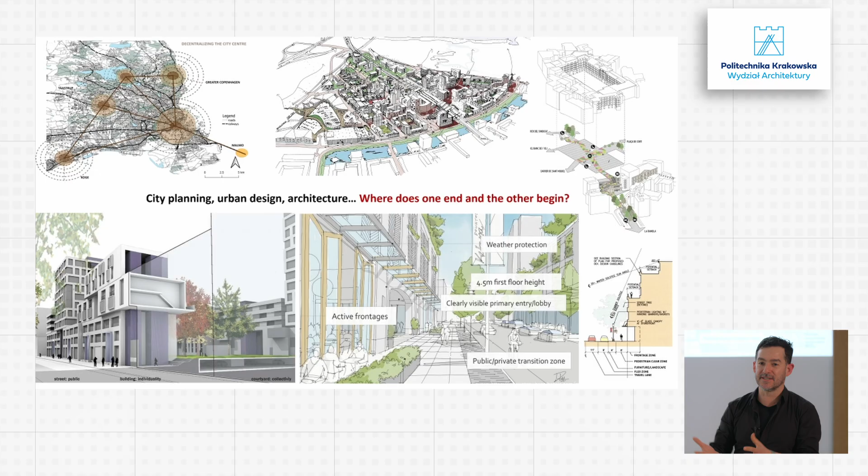City planning is more complex because it goes through all the scales. And architecture is something that we mostly do in the more detailed scales, but of course it also has to do with the larger scales. So all these three disciplines are really interconnected in many different aspects. If we want to put it simply, it is complicated. I would like to show you here some examples. How can we make these complicated things look more simple?

We know very well that those guys made all those things look simple. I mean, the Romans were quite good at creating very successful cities quite fast. They had quite a basic recipe to create cities. All of them looked quite the same. Of course, they were adapted to multiple contexts, but they had this quite standard formula.

They had this grid with two main streets, Cardo and Decumanus, and a wall and a series of public buildings that were very important for the well-being of the inhabitants, from temples, baths, and other types of facilities for the well-functioning of the state.

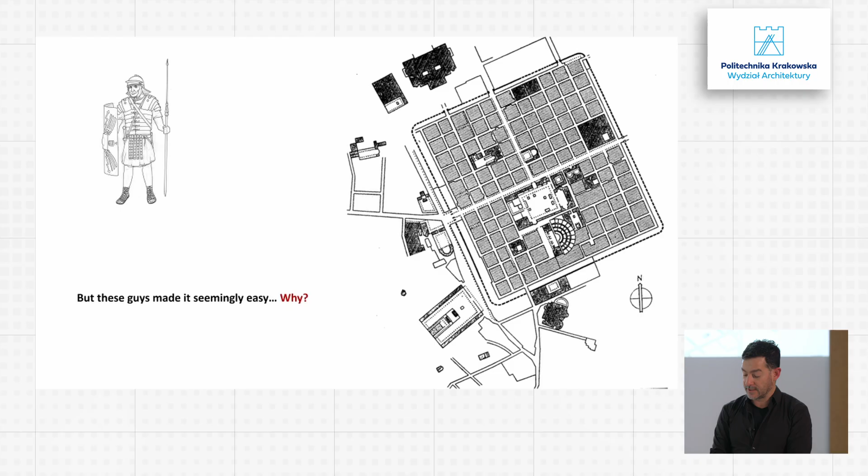Here we have one of those typical things. They were not always exactly square. Of course, they were adapted to the local topography and the local conditions, but those elements were present in most of the cases. And if we see in the drawing, oh, it's not passing. Yep, it's there. Here we can see that it's not exactly that square thing. It is adapted to the topography, but all the elements are there.

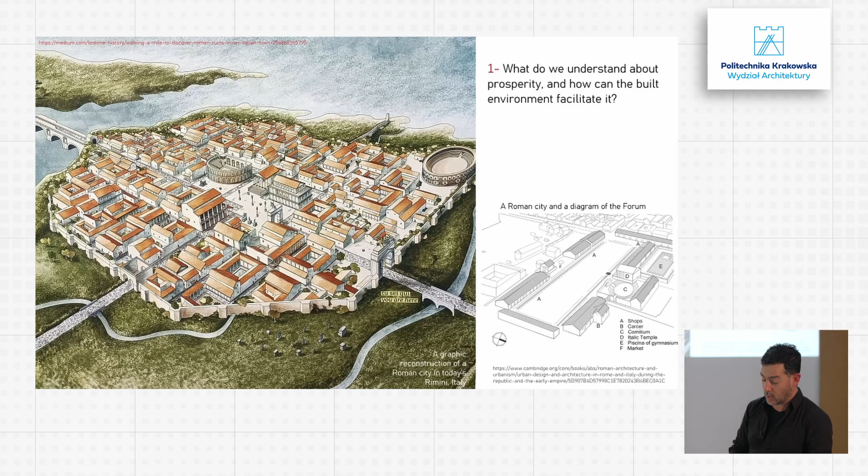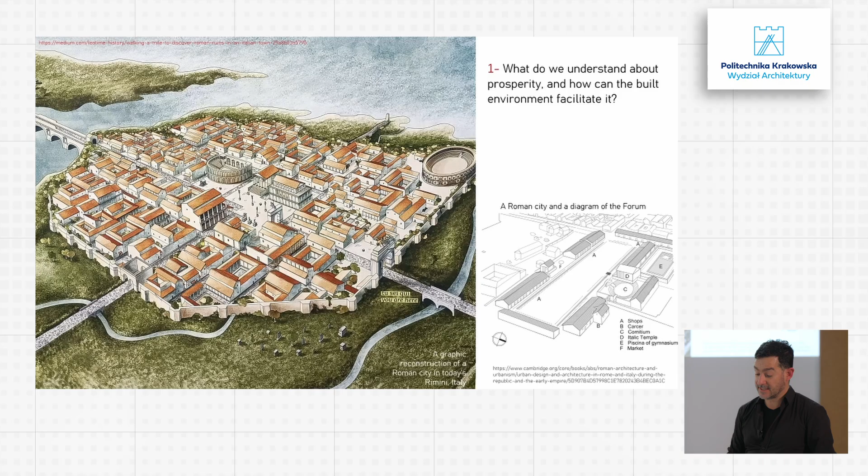So if you see here in the image, you have a series of things. For instance, the main square, of course, had commerce. It was a space for commerce, a marketplace. But it was also the place where you put the main temple, and where you located the most important buildings for the distribution of justice, power, etc.

And the rest were quite simple buildings. They only dedicated much detail, beauty and effort to the very important buildings: the temples, the public buildings. But as you see here, housing and the rest were quite simple buildings. And also infrastructure. They were simple in a way, but they were made for lasting. We still can see pieces of Roman cities in many places, and they have been standing for 2,000 years or more.

And if there is something that we can say is sustainable, it is those things. They have been there for centuries, for millennia, and they are still standing, probably with very poor maintenance in most of the cases.

And the most interesting, they look nice. Probably you have heard of a famous Roman architect. When I was studying architecture, one of the first books we had to read was the Ten Books of Architecture by a Roman architect called Marcus Vitruvius Pollio. And they had this combination of three concepts that for them were very important.

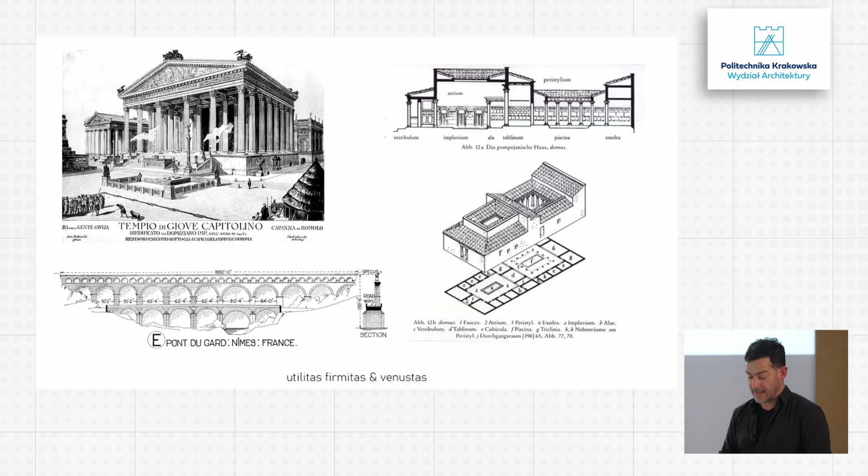Utilitas, which means utility. Firmitas, which means solidity or sturdiness. And Venustas, which means beauty. For them, all buildings have to combine those three elements. So they need to be useful, they need to be strong and solid, and they need to be beautiful.

Well, those other guys here, the Spaniards, when they went to the Americas, I think they also made quite good cities there, many interesting cities, and they had probably an even simpler formula for making cities. They had this basic, they called it the Laws of the Indies, and they had this very simple grid, in many ways similar to the Roman cities.

And basically what they did is that they distributed and separated very clearly the public from the private. They allocated to different people and institutions some plots in this grid. And of course, they located the very important buildings in the center around the main square.

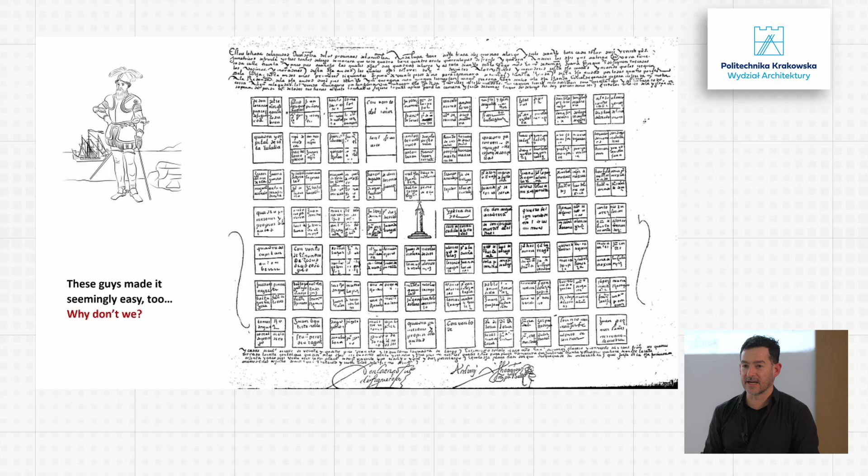And some facilities, of course, at that time, the state was mostly concerned about military power. Hospitals, education, that was a matter for the church. So they gave many of those very well located plots to different orders in the church, and they created convents, hospitals, schools, and so on. And of course there was some detail and care for beauty in the church, but for the rest, it was quite minimalistic.

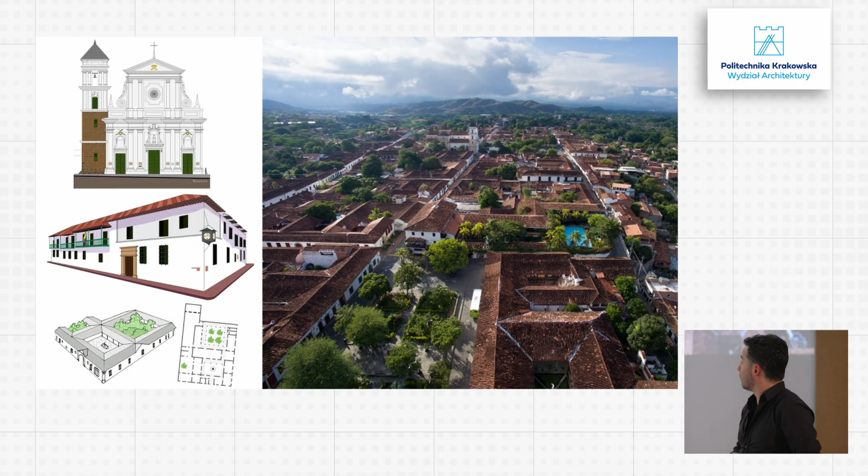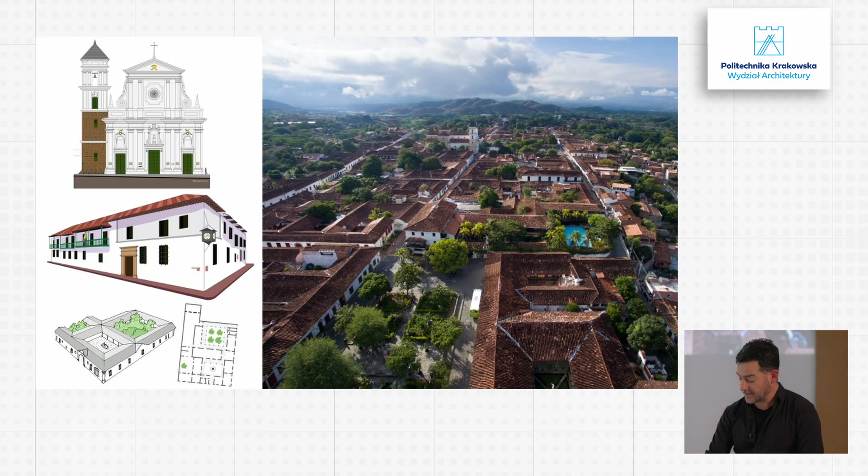And as you can see here, this is a Spanish city in my home region. It's called Santa Fe de Antioquia, in Colombia. As you see, it's a very simple city with this very simple structure, and it still looks quite nice. It's a heritage site in Colombia, and it's very popular with tourists and local people as well.

And I would say the same here in Cracow. I mean, those people in the Middle Ages, they had very simple formulas as well to make very nice cities. And indeed, Cracow is an impressive city. And the formula was quite similar to the previous formulas.

They located the very important buildings in the main square, but the squares were mostly an empty space for multiple activities, both for markets and for ceremonies, religious or civil ceremonies. And of course, in this main square was the church and the main public building.

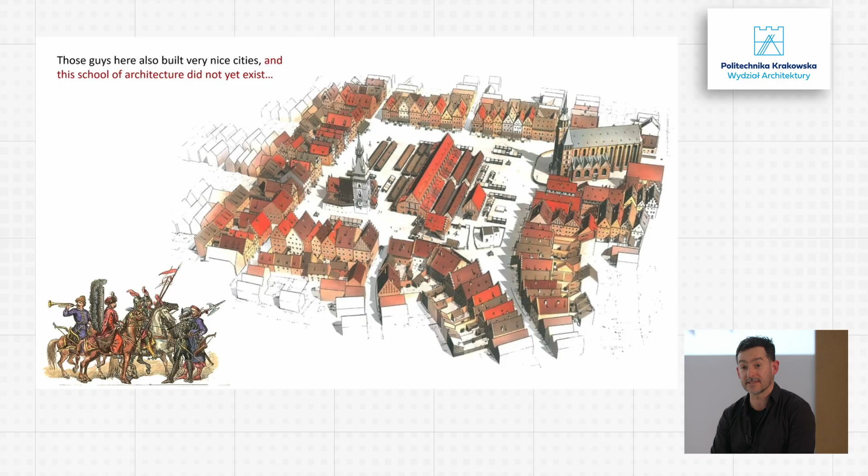And for the rest, they had, of course, some regulations for buildings, and all of them were grouped in blocks. So putting buildings together in blocks was a characteristic of those historic cities that you have seen in all three examples before.

Well, here we have a new development in Cracow. They are planning to have a city or a part of a city in Cracow for 100,000 inhabitants. And then I wonder, will the inhabitants call this area beautiful? Or will this part of the city be of interest, let's say, for the people who visit Cracow?

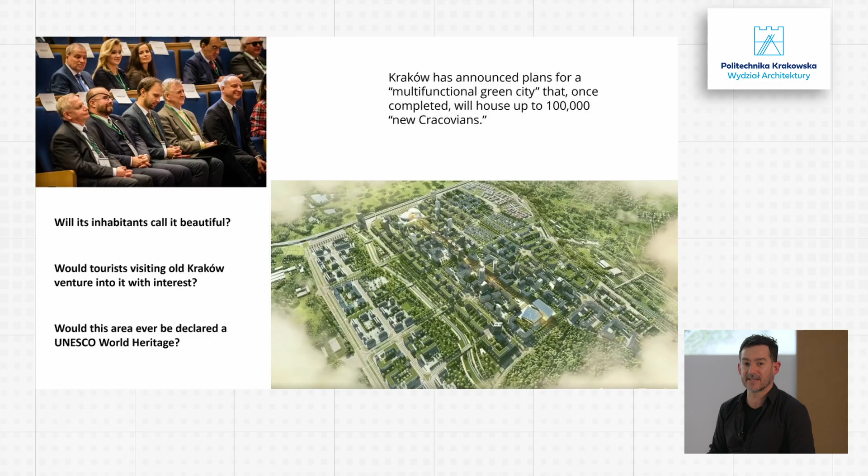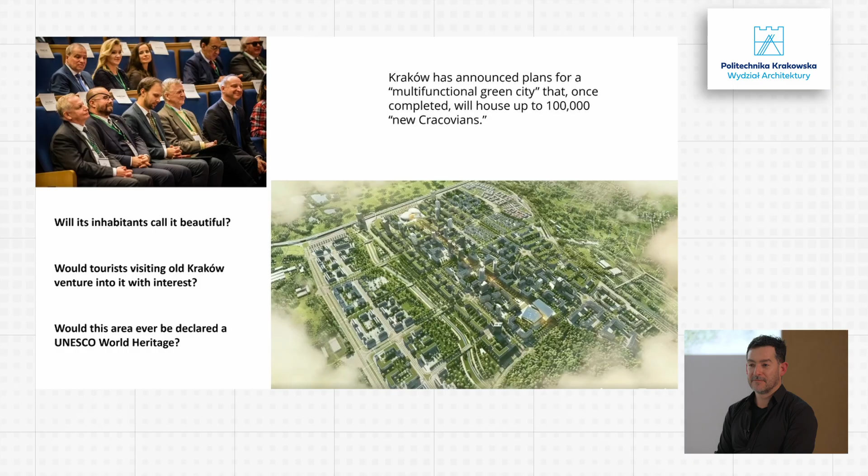Will it become an area, let's say, to declare UNESCO World Heritage? And, well, I guess that many of you will probably answer those questions with skepticism. And we know that we are quite bad today at making things that are beautiful, that are solid enough.

So I came to this question actually through a podcast. It's a philosopher that you can probably find easily on YouTube. He's called Alain de Botton, and he has a YouTube channel called The School of Life. It's about many things, but he has a few things about the built environment and why cities matter.

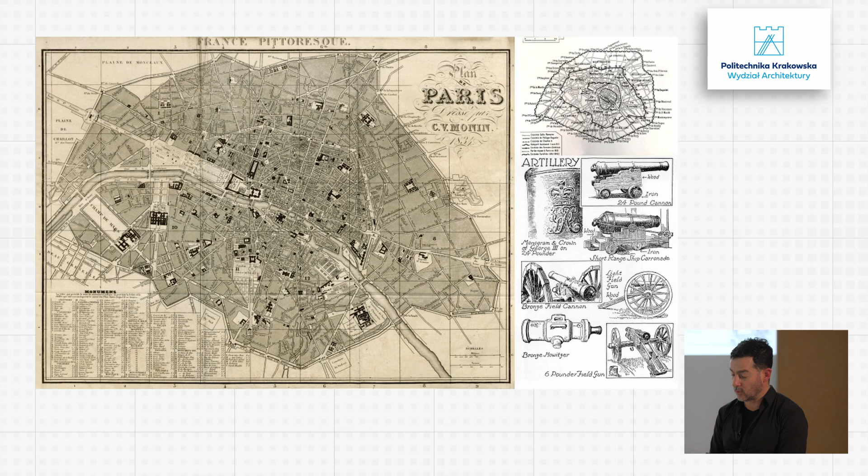And because of advances in technology, basically in artillery, those walls became problematic or unnecessary and so on. So they were removed, as they were removed here in Cracow. So that was one of the first problematic things in old cities. They were not good enough to be protected against the threat of war.

But of course, in many ways they had aesthetic problems. Many buildings were probably derelict, at least that was the case in Paris in the mid-19th century. They also had problems with functionality. It was difficult, let's say, to provide appropriate transport in a complicated, intricate network with a lot of narrow alleys.

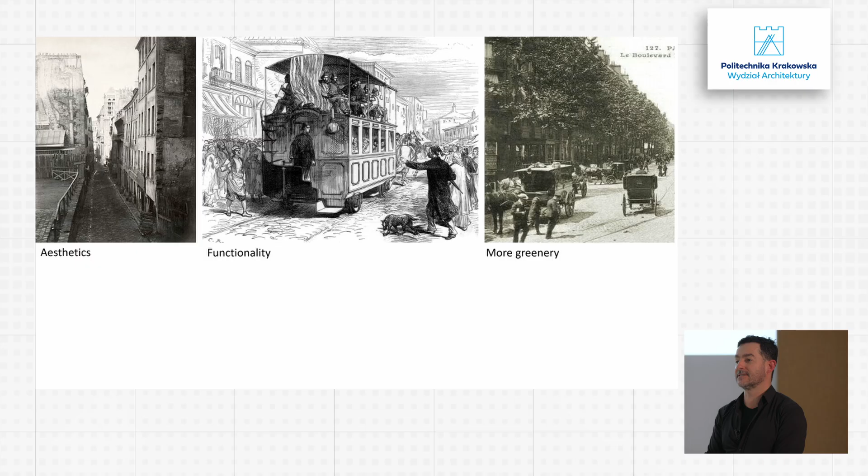And people started to realize with the advance of science that greenery, access to natural light, etc., was important for public health. So health became very important with the advance of science. We started to discover that many diseases were due to poor sanitation conditions, lack of air quality, lack of access to sunlight, hygiene. We needed better infrastructure, sewage, water, etc., and security.

So local authorities decided to make a big plan, because at that time they thought that changing cities can also change societies.

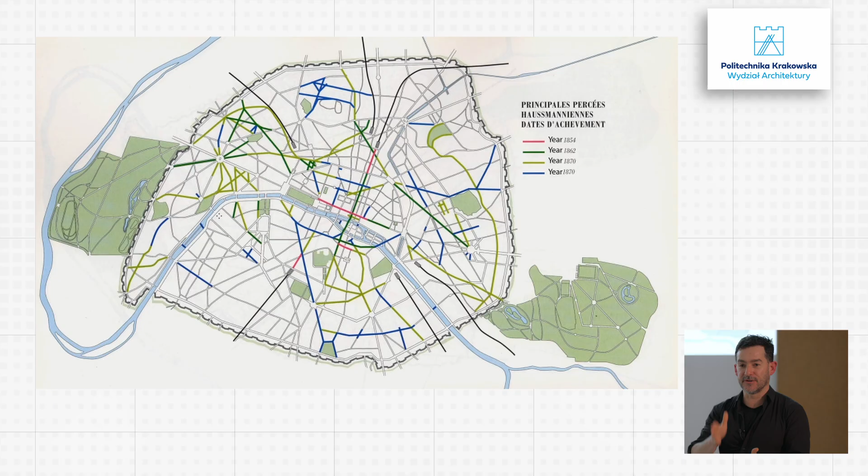And the plan was quite ambitious, because as you remember the previous map, Paris was kind of dense and very intricate with this medieval compact core. And what they decide is to make a series of new streets, new avenues, cutting this medieval tissue, this medieval fabric. In this way, they just go directly, straight lines, cutting through the medieval fabric, and that's the result that they had.

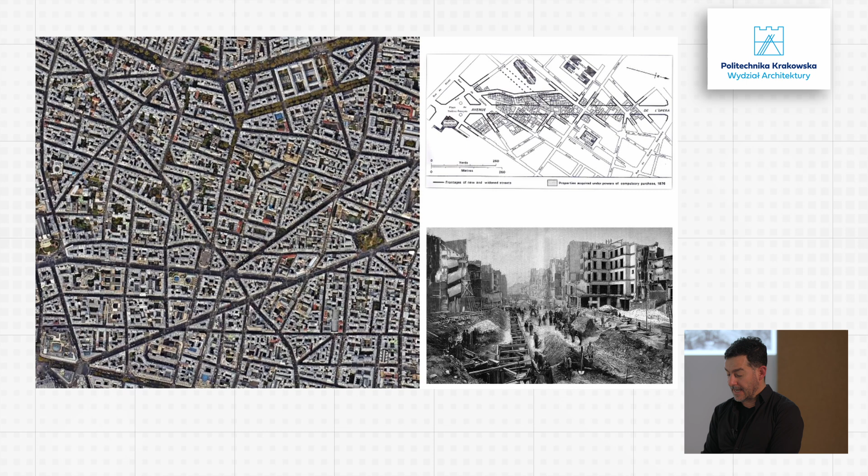So this plan, which is known as the Haussmann plan, lasts for 20 years. Haussmann was the mayor of Paris during that period between 1850 and 1870. And he did the very famous Paris that we know today, that we find very attractive. It's one of the cities most visited by tourists. And this way of dealing with cities kind of became fashionable, and many cities started to do similar things elsewhere.

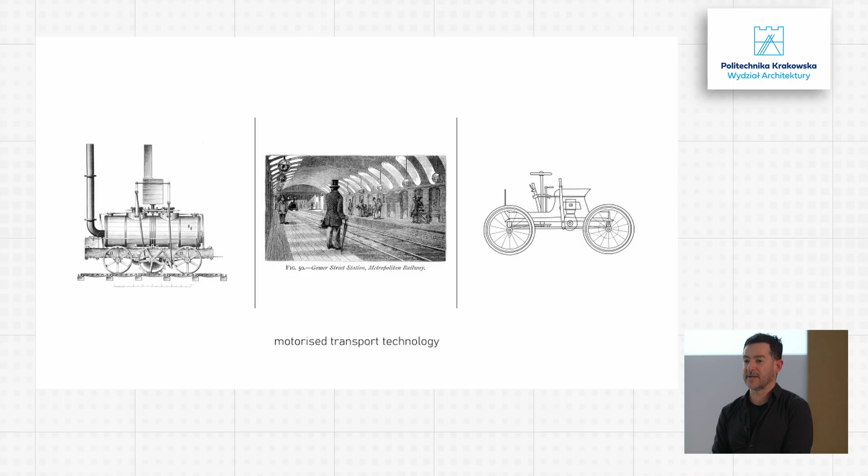But also in the late 19th century, we have a lot of new technological developments, and those new technologies also created new possibilities. The one, of course, was the introduction of the steam machine, the railroad. The first metro line, or the metropolitan train, was established in London around the 1850s. Paris and many other cities followed quite quickly. And the first cars started to appear.

And also we had a lot of developments in new materials that were quite radical for the time. It was the case of steel and glass. Imagine that in the Middle Ages, except for the cathedrals, most buildings were obliged to have very solid walls, small windows. We were unable to do those big glasses, so all was quite dark. And suddenly it was possible to have very light structures with a lot of glass. It was quite a revolution.

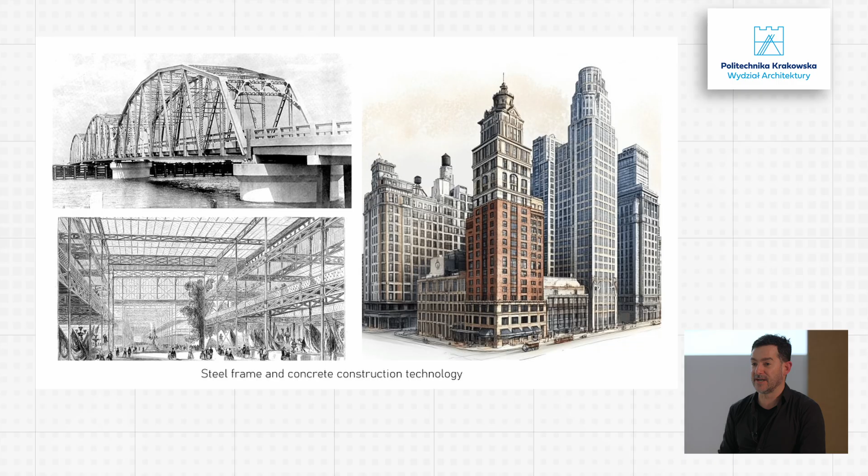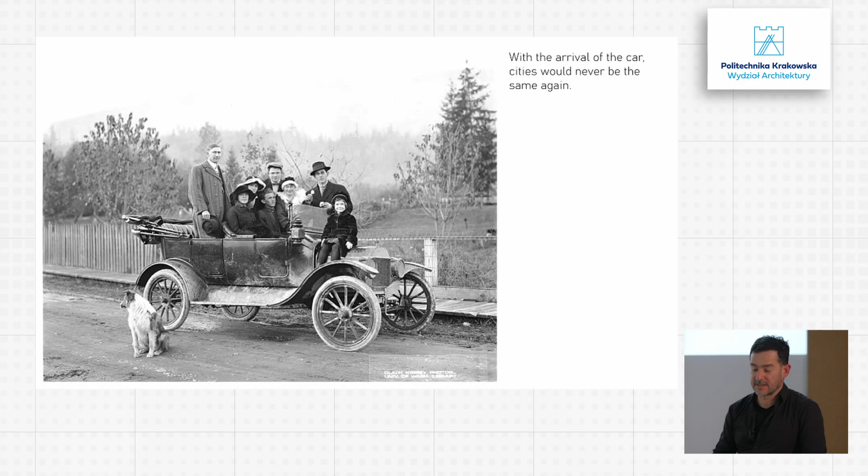And later in the United States, of course, it was also possible to do very high buildings very quickly, high-rise skyscrapers. So it was a huge revolution. And then we have the car. Initially, the car was to replace the carriage pulled by horses, and it was more a curiosity, something for the weekends. But very quickly an industrial production of cars was developed, cars became very cheap, and many people started to buy them. And they were very problematic in cities. Basically, traditional cities didn't have space, as they don't have today, for running a transport based on cars.

So then architects start to look for new solutions or new ideas about cities that can accommodate all those things. Okay, we have problems with hygiene. Cities are very compact. We don't have enough greenery. We don't have enough space for cars, and so on and so forth. And there were two very popular, well-known models. The one that you see on the screen was the Broadacre City in the United States by Frank Lloyd Wright. All of them were around the 1920s.

And basically, in the US, it's a huge country with a lot of land. And the type of city Frank Lloyd Wright envisioned was a city basically merging rural lifestyle with urban lifestyle, with new vehicles, and it was quite visionary. Those are not exactly drones, but look like drones in the 1920s, because of new flying devices. The aviation was starting, but also cars. So he thought that it was possible to live wherever you like in the vast territory of the United States. So it was basically cities where everybody would have an acre of land, facilities and production would be concentrated in some areas, and people would move around with these new technologies, meaning mostly cars.

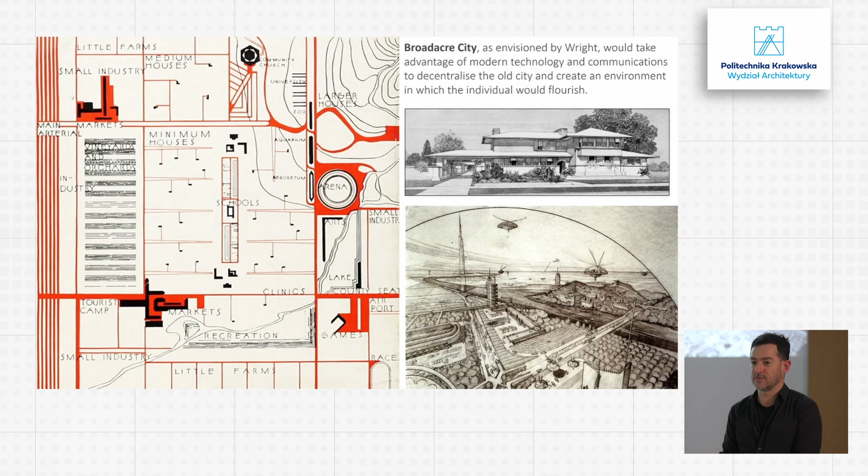In Europe, of course, we had quite a different situation. Cities were more compact. Land was not as abundant as in the United States. So Le Corbusier, that probably you all know, a very famous Swiss-French architect, came with an idea of making cities compact, not as Wright, who really wanted low-density cities. For Le Corbusier, the idea was to concentrate cities by functions. For him, cities were kind of machines for efficiency. The problem of traditional cities was that they were, according to him, very inefficient because they were mixing everything: traditional blocks mixing businesses on the first floors, housing on the upper floors. They were noisy, and everywhere it was a mess.

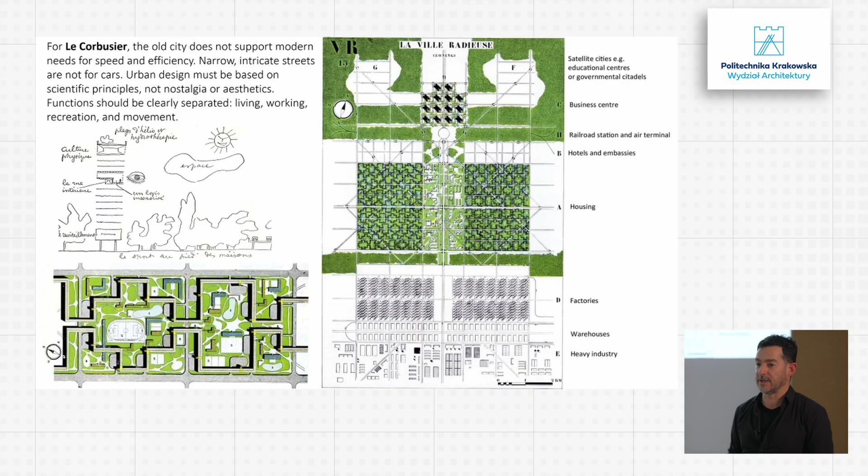But thanks to cars, it will be possible to divide and separate those functions. And basically, he came to the idea, as you see in this diagram, that it was possible to separate. In the upper part of the image, you see offices with administrative buildings. In the middle, you see houses. Then in the lower part, you see factories. And of course, in between, a lot of green areas where people will have possibilities to do sport, enjoy nature, and people will travel between those areas using cars, of course, and modern transport.

All of those visions had something against traditional blocks. As you know, all those old cities that we saw had these traditional blocks that you see there on the left. And for Le Corbusier, the way of dealing with blocks was to concentrate them in large superblocks with a lot of high-rise housing.

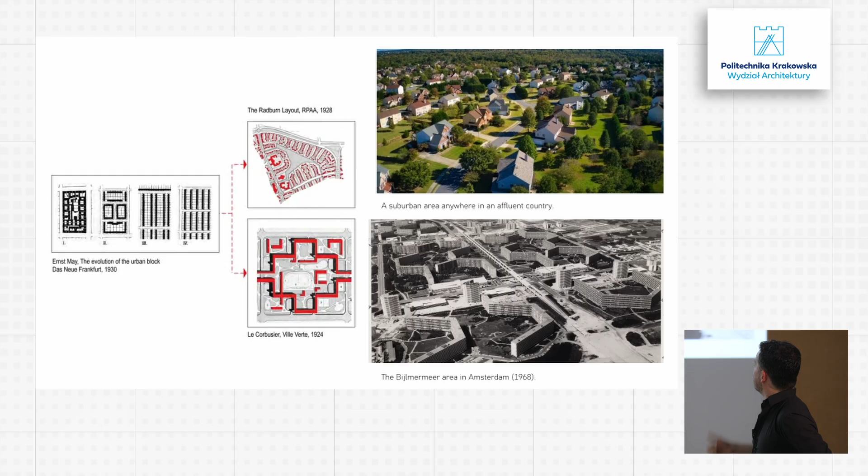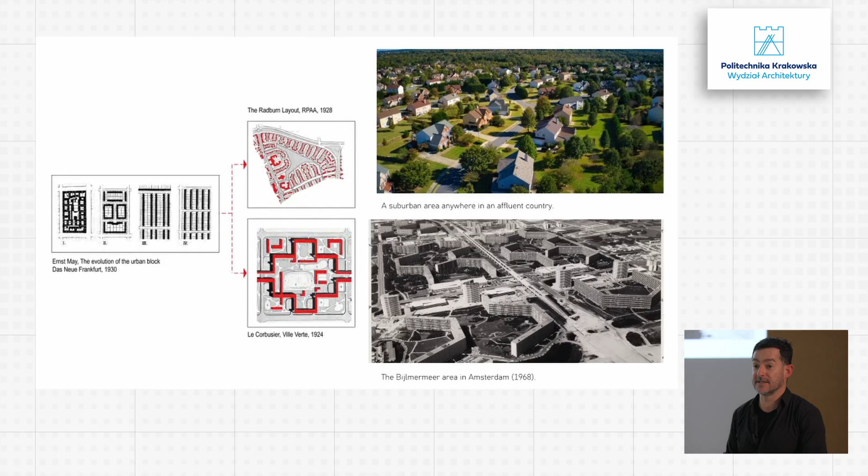And in the United States, in the application of Wright's principle, it was of course not possible to have that much space, but they came to this diagram that they call the Radburn layout. And probably you recognize this type of pattern in many cities today. It's still going on. It was a layout developed almost 100 years ago, and it is very common in all suburban areas today. And of course, the Le Corbusier approach was also very much applied, especially after the 1950s in the post-war cities in Europe.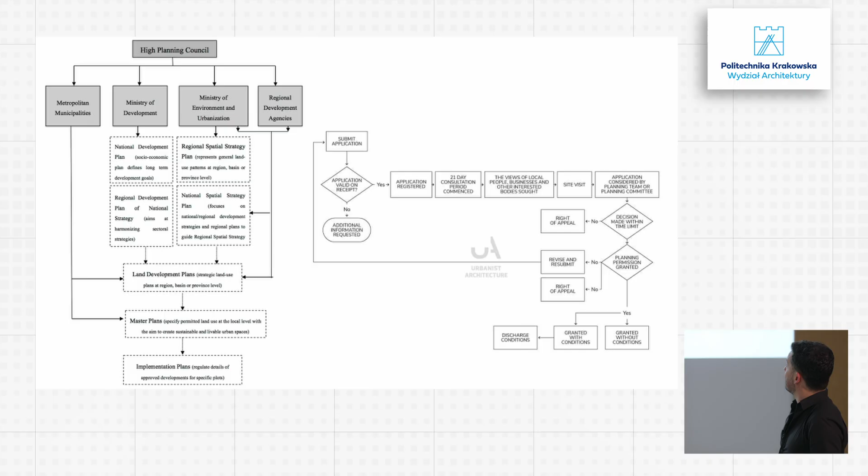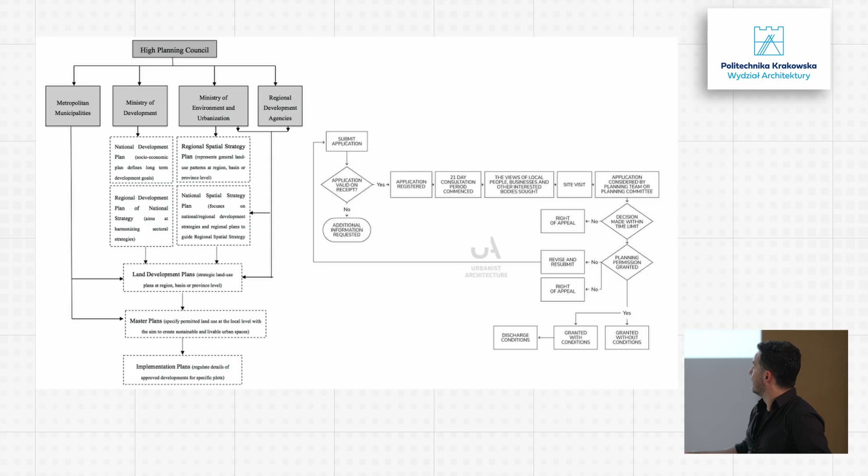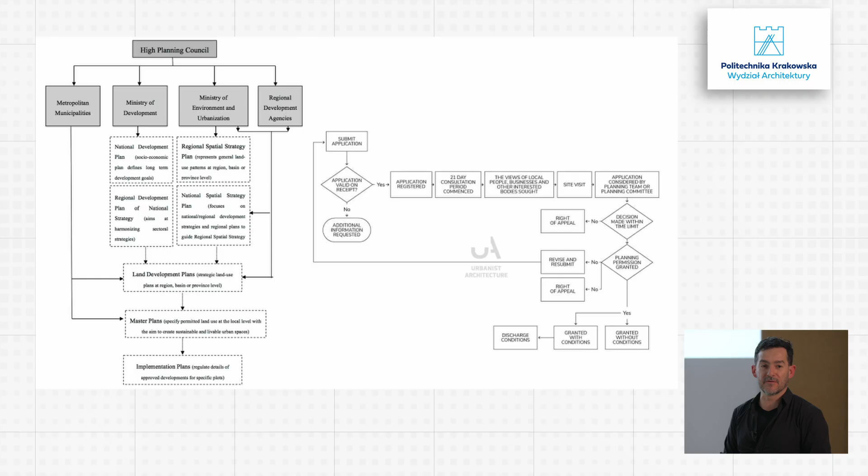The other problem, of course, is that modern planning is much more complicated than in the past. So we develop very complicated systems to develop urban areas. Our planning system goes to different levels: centralized, local governments, ministries, a lot of laws at different levels. Just to ask for permission to build a house, we need to go through long processes that can take months. Many times you are asked to ask your neighbors if they approve or not. So many people have a say in how we build cities today.

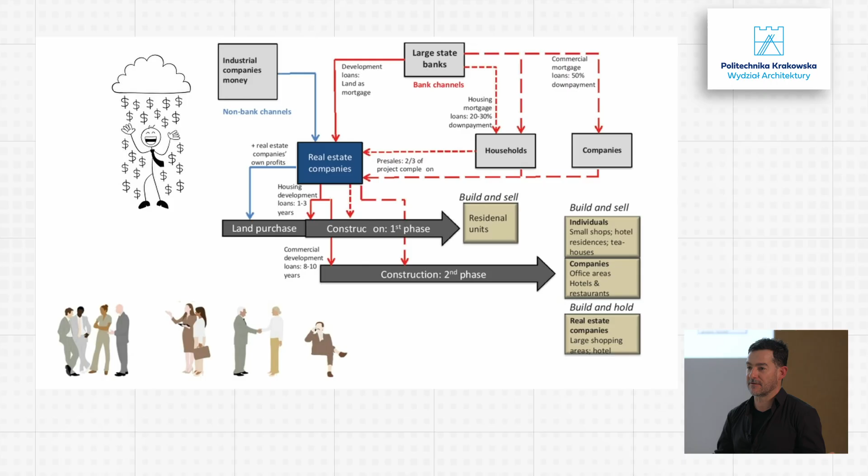And in addition to that, the city became a money-making machine. So we have developers, people looking for business opportunities to sell offices, to sell houses, and they want to make that money quick, to make it cheap, to make a profit. And then we end up making the process of developing good cities quite complicated. But I don't want to scare you with that process. I think you are here studying architecture because you want to do something good for society.

There are a few things that we need to learn from traditional cities. Traditional cities have been there for hundreds of years and they work well. Different from the previous models that we saw, they have quite high densities. For instance, this is a city in India, but the same things are found in many cities around the world. All of them, when it comes to open and built space, are around 50-50. Built space is around 50%, and open space is around 50%, but of this open space, public is around 40%, and private open space is around 10%. Of course, those percentages vary from place to place, but this is something to keep in mind.

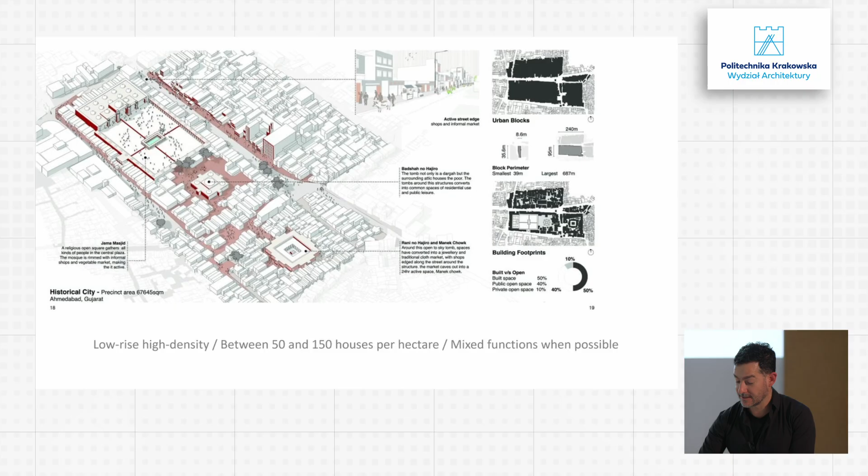And of course, there are formal aspects. Of course, there are social aspects. There is about activities. But what we need to consider is cities and structures that can be adapted to different needs. One of the problems that we commit very often when we design public spaces is that we think them for one or two activities and that's it.

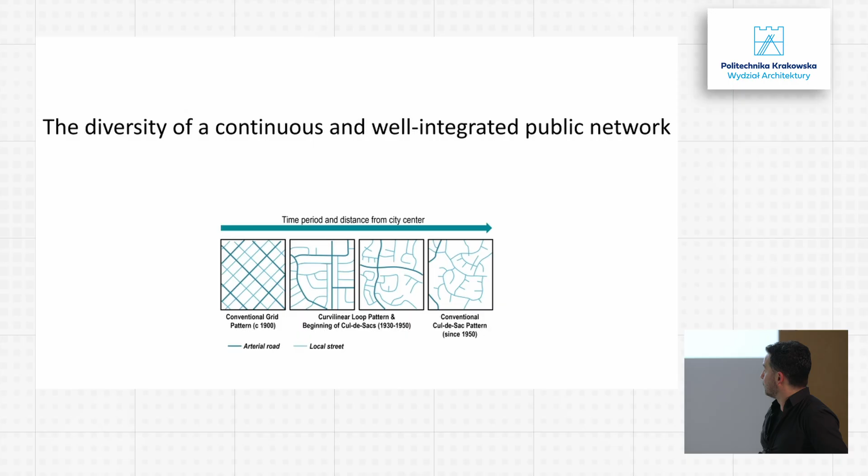The other very important element when you start thinking of your design is the type of network. So we have evolved networks in this way. You see from the left, the very compact networks of traditional cities. Then around the 1930s, we started to introduce more curvilinear loops, patterns, and we ended up in those conventional cul-de-sacs or lollipops that are very inconvenient.

I mean, if you live in an area like those cul-de-sacs, most likely you will need a car to go everywhere. So if you want to have a nice coffee, you need to have a car, then you need to find a parking place to go to the center of the city, and you are very limited by the possibilities of transportation.

If you are a young person, you live with your family, so basically you are depending on your parents to move you around. Or if you are an old person and you have problems driving, basically you cannot live there because you will be closed in your house forever until you die.

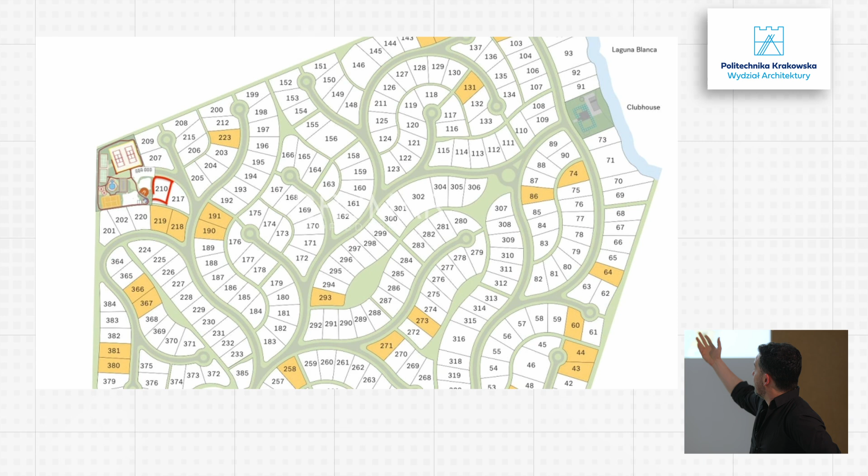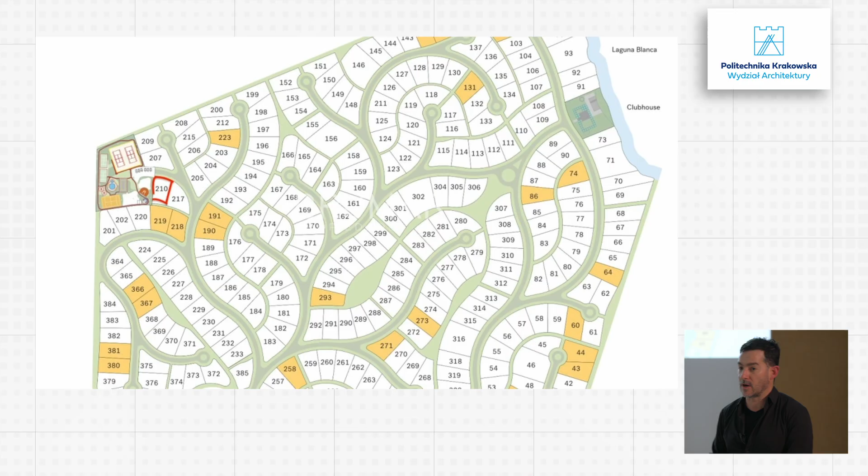You don't know if a psychopath will come from one of those houses and do something crazy. So there's no control over the public space. And basically, all is car dependent. So in a way, this type of design that we have been implementing in all the new developments everywhere is quite a bad idea.

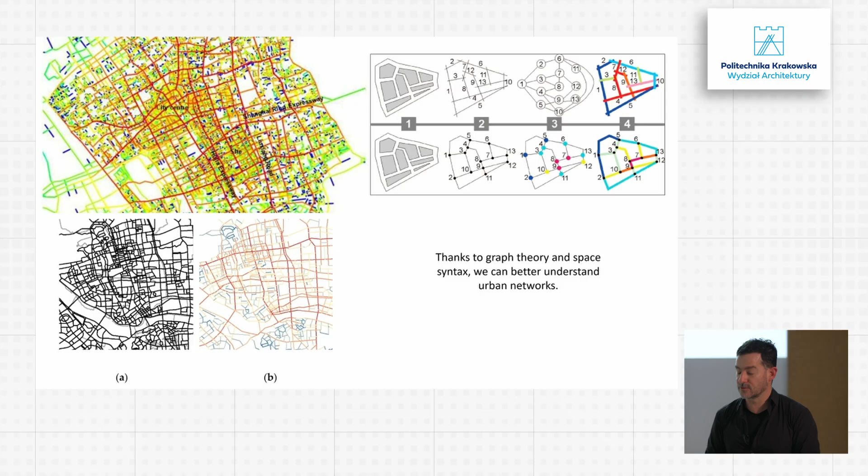So you create all this diversity of spaces for different needs, very attractive spaces for tourists or for just hanging around, enjoying a coffee, watching people, or quieter places for studying or just for having a quiet night as well. So if we develop those complex networks, we will have a tremendous diversity of spaces that are good for everybody's needs. And that's the thing that we forget when we oversimplified city planning in the models, as you saw previously, those modernistic models.

The possibility of having a good street network is that they are very flexible. Here I have an example from Barcelona. Probably you have heard, or you will visit, or you have heard of the super blocks. As you know, Barcelona was one of those plans developed in the late 19th century, and they developed a very well-connected grid with broad streets. And of course, until 10, 15 years ago, all of those streets were just for cars, and if you compare the space for cars and the space for people, the space for cars was like 80%, and the space for people in the sidewalks probably 20%.

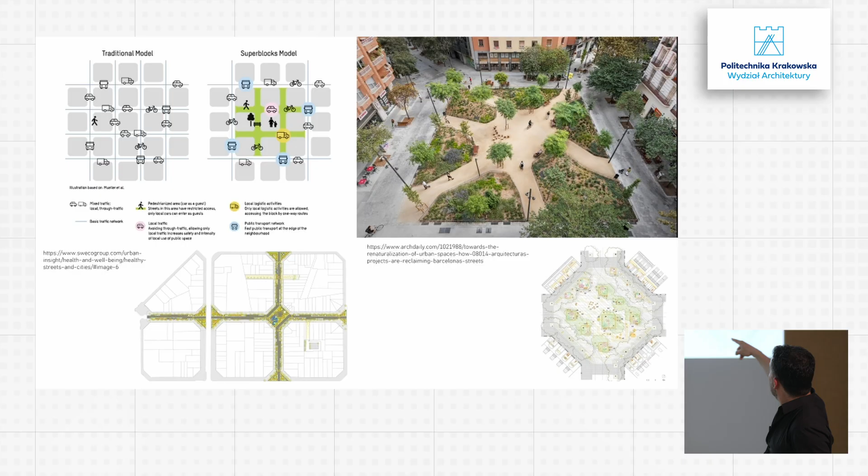But what they started to do now is those super blocks. So they start to close groups of blocks and develop those very interesting shared spaces. Those are the spaces where they share the surfaces with different mechanisms. They share the space for pedestrians and cars, but cars really need to go very slow because they are supposed to be areas where cars and people can coexist. And of course, they introduce a lot of greenery. There are a lot of concepts to make cities more climate proof.

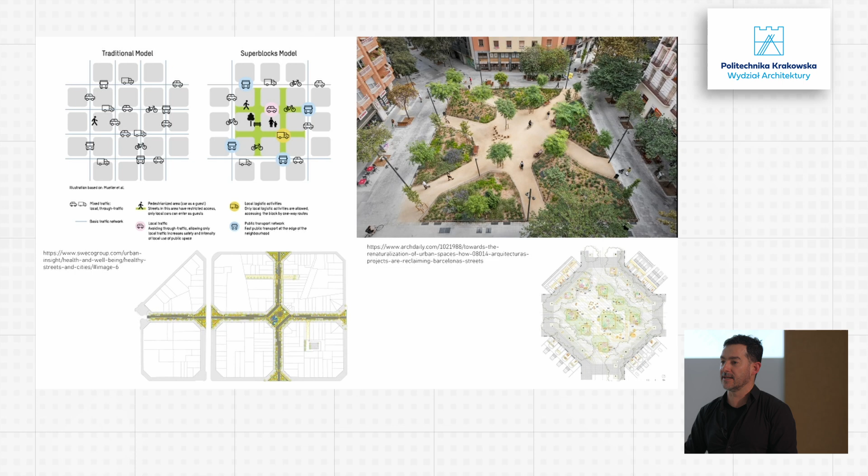Probably you will hear or at some point study about nature-based solutions, plants and vegetation, and they are good in many ways for making cities cooler in summer, but also, if there is rain, to capture rain and avoid flooding. So all those things are being combined today in streets.

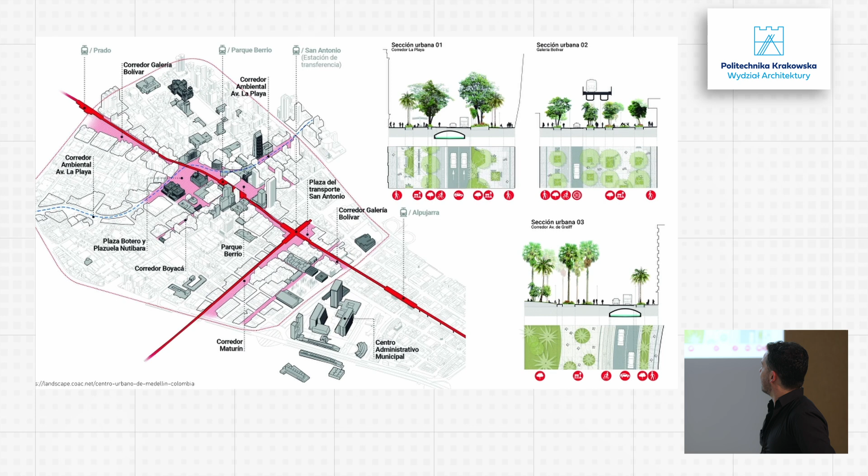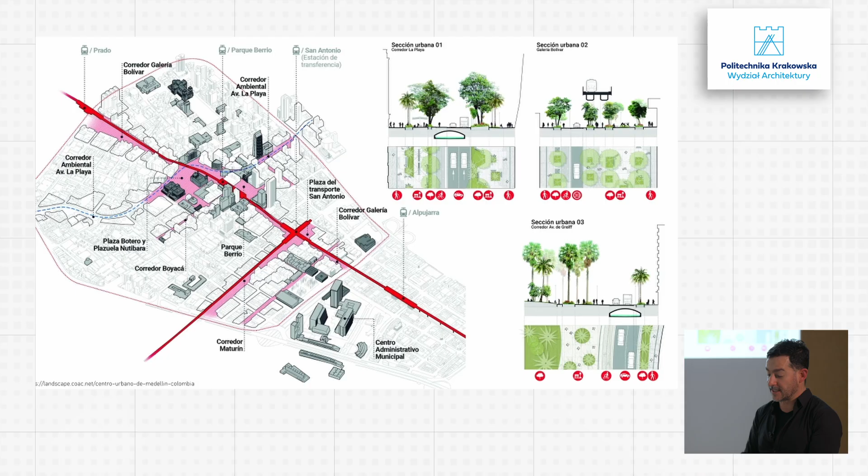This is another example of Medellin, Colombia. That's my home city. And in the center, of course, they have done many things, some of them horrible. But in the 1980s, they built a metro line, which is a viaduct. It was originally quite an ugly piece of infrastructure, but now they have been introducing a lot of vegetation and taking out a lot of space for cars. And basically, they are making the city center very attractive just by improving public spaces, creating those public spaces interconnected and introducing greenery.

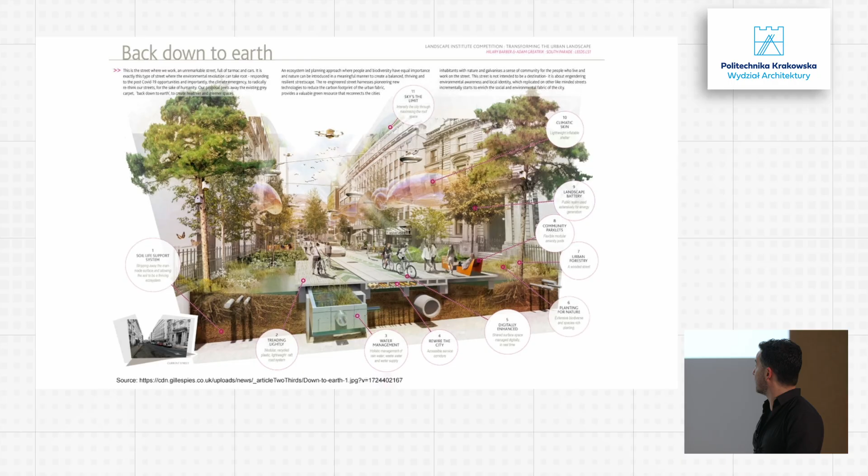And here is a graphic representing how we see cities today as multifunctional spaces, not only for circulation of cars, but also for greenery, for people to use as public spaces, for people to share. And of course, the other key thing in building high quality urban areas is back to the traditional block. Here I have some examples.

What is beautiful about the traditional blocks is that they are very flexible. They are very multifunctional. You think of each of those buildings and they can be reused in many different ways. So this is the truly sustainable urban form, because you don't need to demolish everything. You can just refurbish each of those buildings one by one according to different needs. They can accommodate multiple functions.

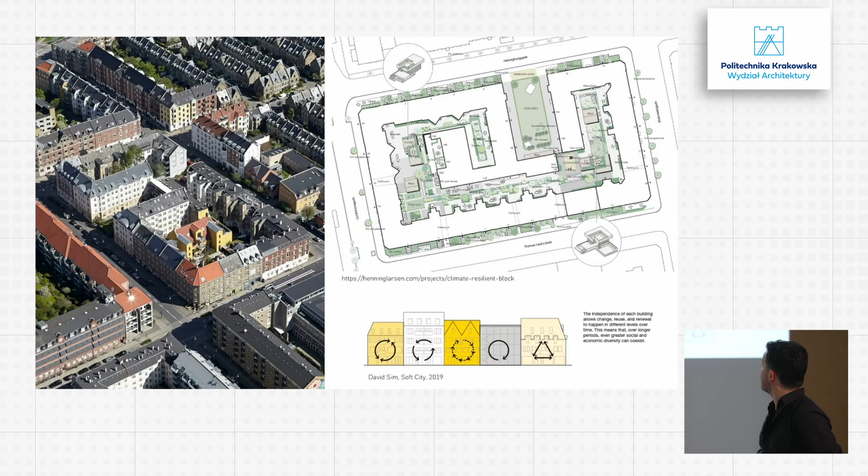They can have commercial facilities on the ground floor. They can have quiet areas in the green courtyards in the center of the block. And they can have quite sophisticated penthouses at the top, terraces, many functions there. So a block can be a small city in itself with a lot of diversity.

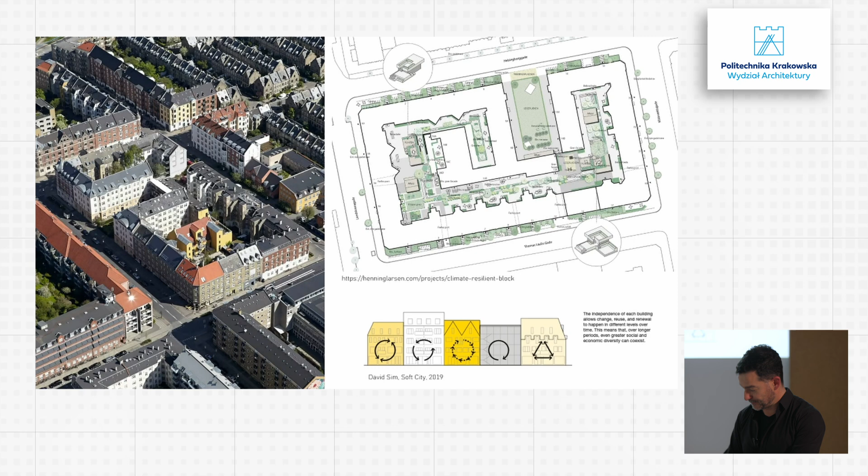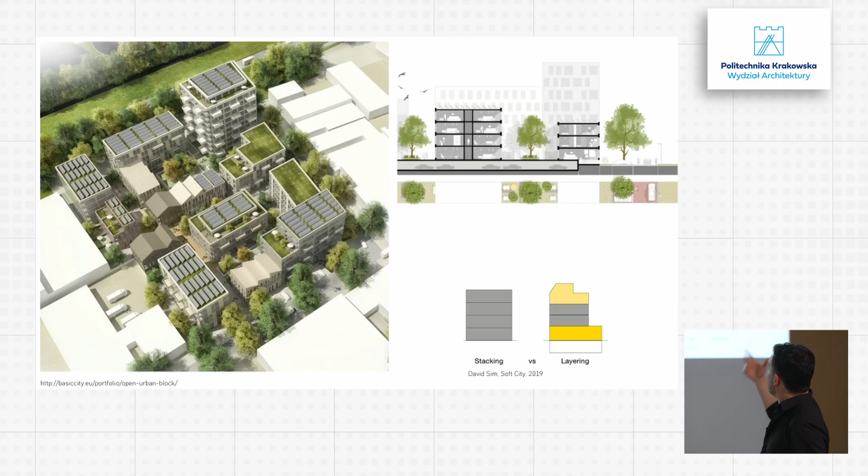So it is this concept that I like a lot by David Sim. He called it layering. So really designing every layer of the city as a separate, well-integrated element. So the underground, of course, can be used for parking or for storage. The ground floor for public activities, for commercial activities. Then you can have apartments in between and quite special functions in the top, green terraces, etc. And you can create a lot of diversity in those blocks.

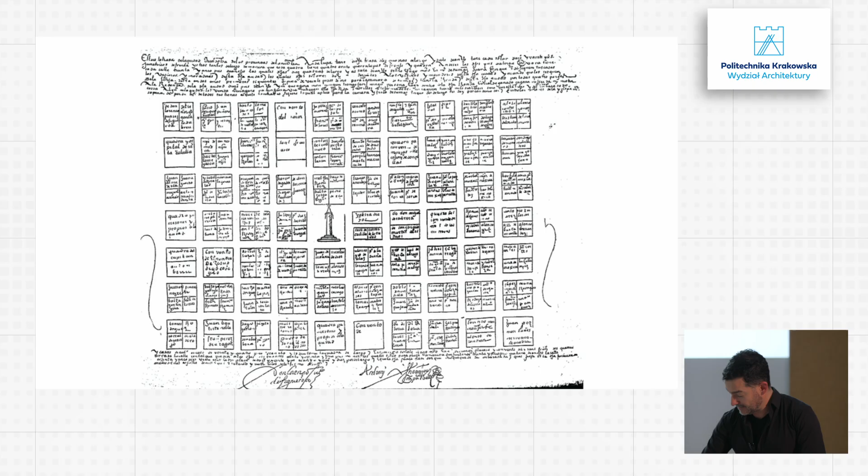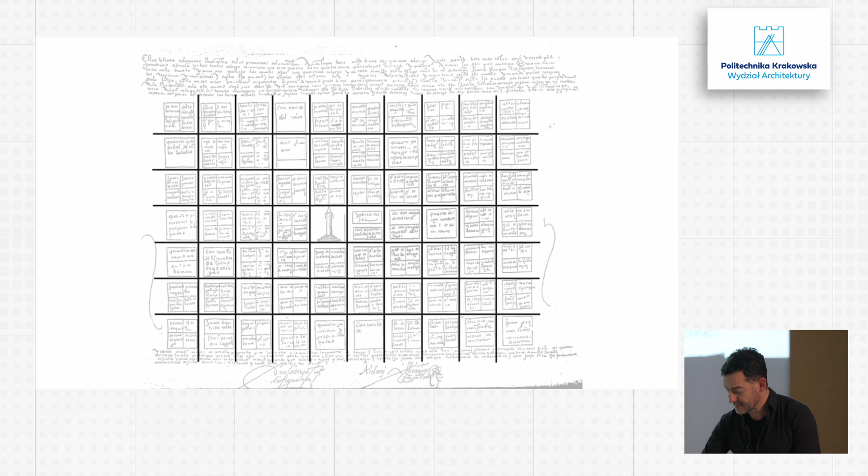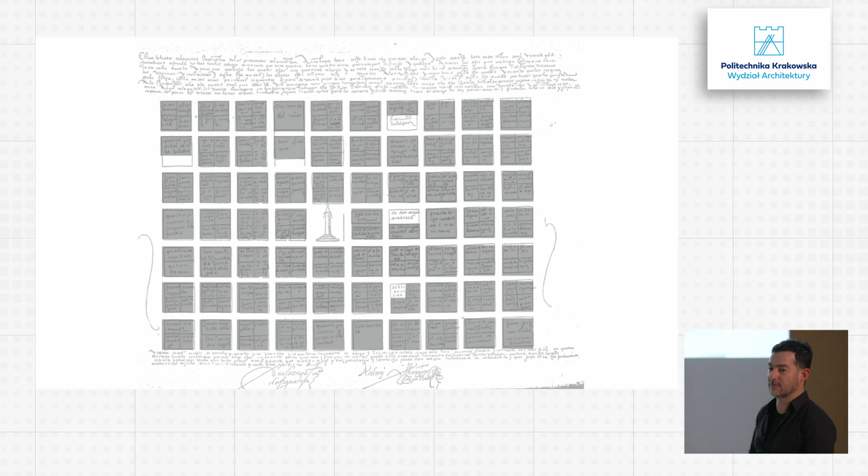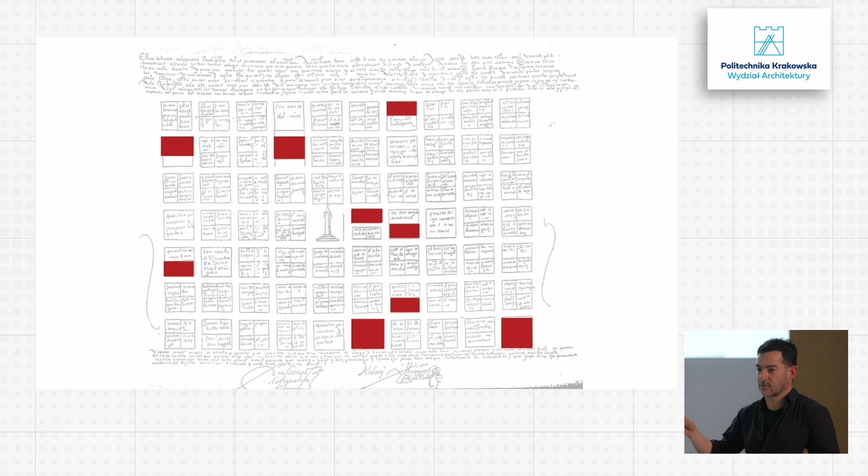So back to the basics. I will go back to this very simple layout of a city. So what these people did well, they created a very clear street network. They did a very clear separation between public and private. So those are all ingredients for a good urban design. So clearly separate what is public and what is private. They added some key functions, different places, some schools, hospitals, public facilities.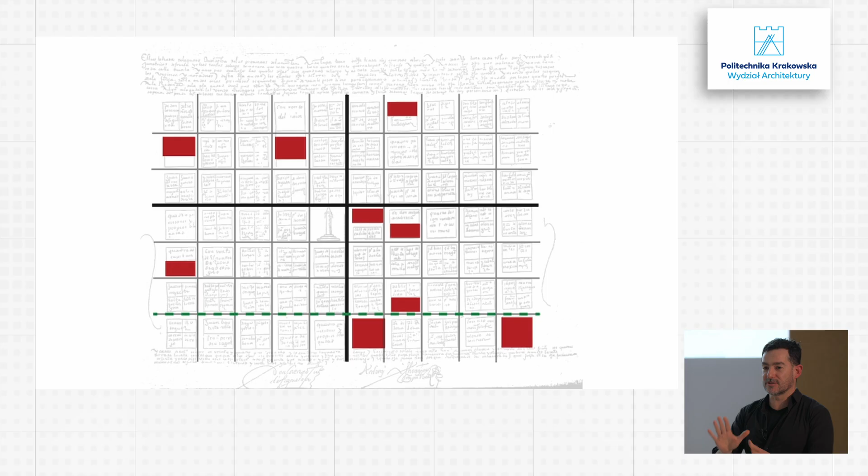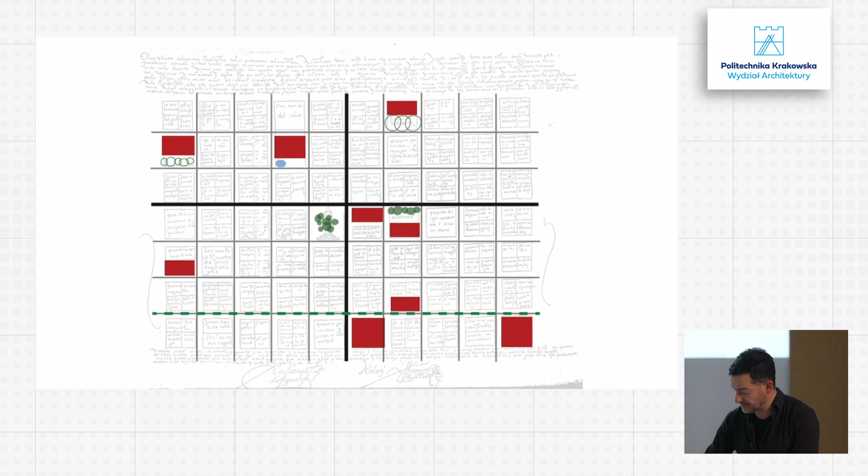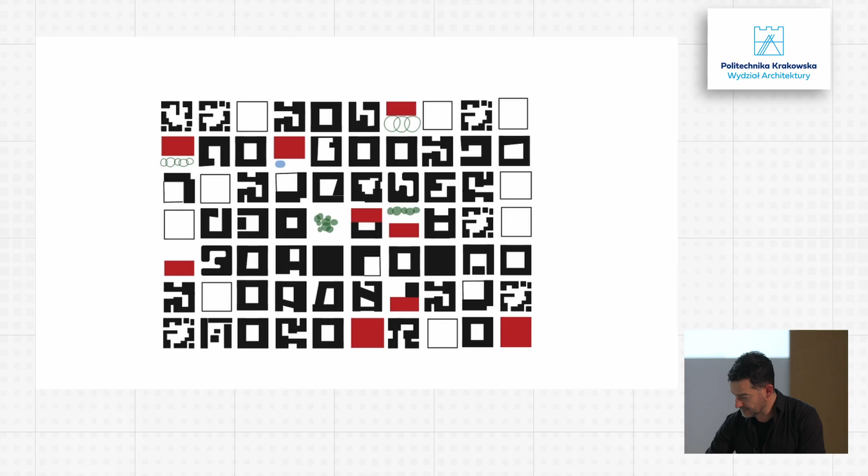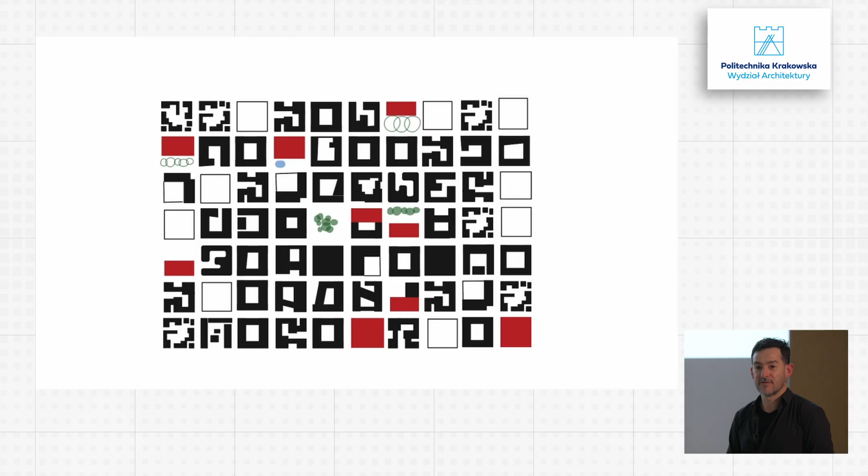Eventually, they created some of those streets with different characteristics, some more broad or with a different treatment. They added, in some cases, some greenery, some fountains, or some interesting things in the public space, but not necessarily. In many cases, those were just hard squares of stone to have different events. They add buildings in blocks, and blocks, as you have seen, have many possibilities. So in that way, with very simple elements, it is possible to create highly diverse cities with a lot of possibilities for everybody.

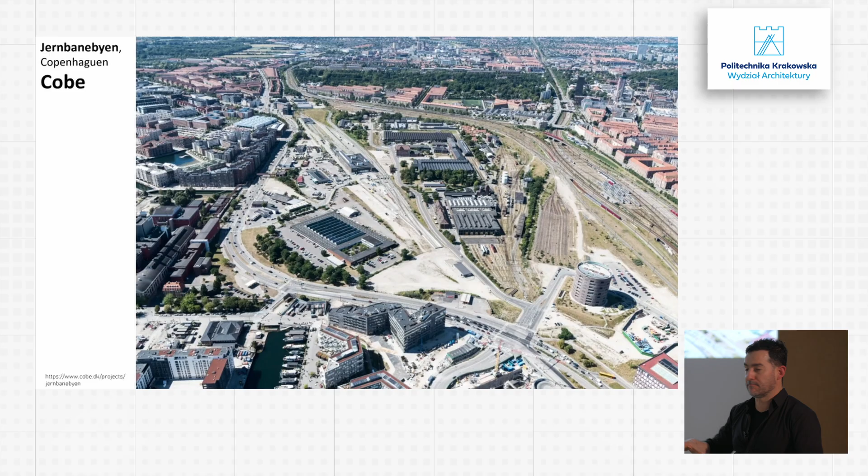So I came to a very interesting example. I know that some of you are working in an area in the periphery of Cracow with a lot of challenges because of infrastructure and so on. And I have an interesting example, in a way applying those principles in today's case. And it's this area in the center of Copenhagen. It is Jernbanebyen, so it is railway city. And it's by a consultancy company called Cobe. It's a large consultancy company, and they also do architecture and urban design, but construction, many things.

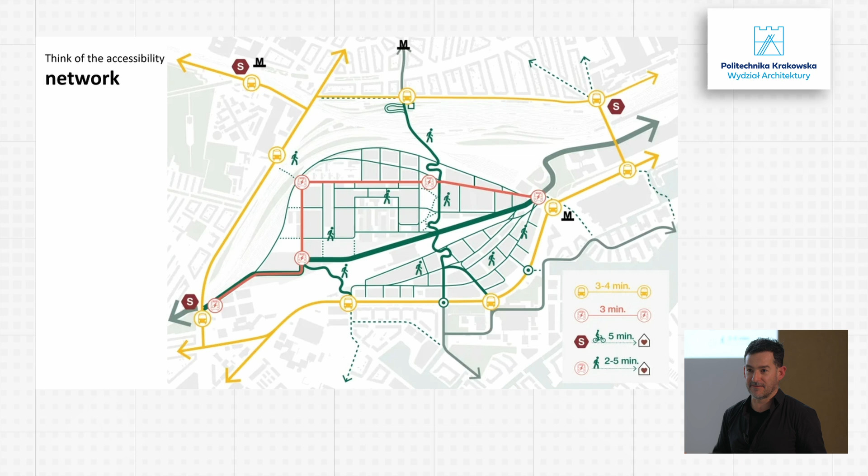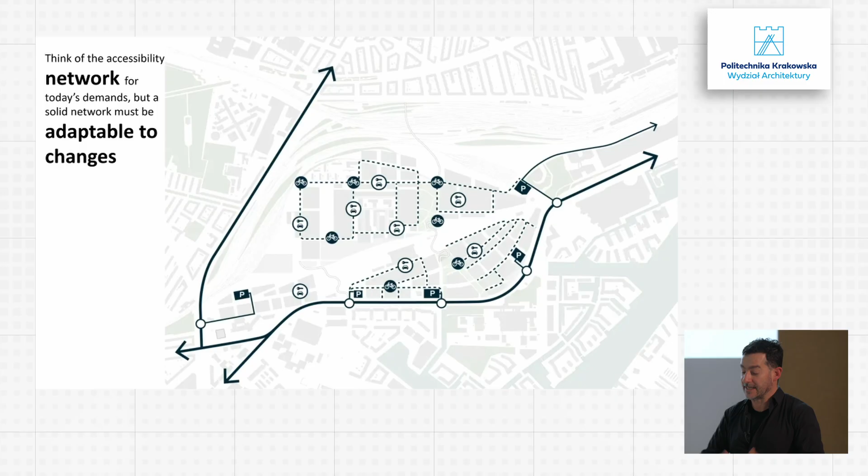So remember the elements. So first, think of your grid. So connect the area that you are dealing with whatever is around, with nature or with facilities, and create a solid network. Think of that network, of course, in terms of functionality, but consider that that functionality may change with time. Remember, for instance, the example of Barcelona. Those streets were initially designed in the 19th century, before cars. They were designed for horses and for other things, but they have been changed in many ways. So those networks need to be very flexible and support many functions that we don't know, but we need to make them robust enough to support change.

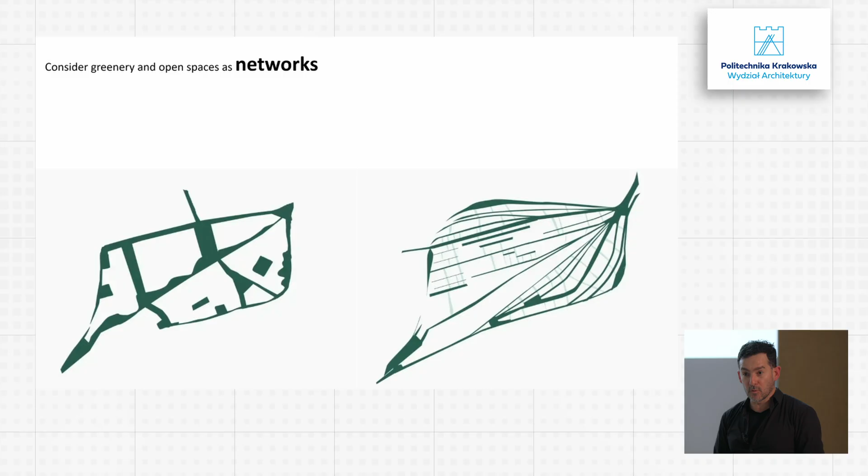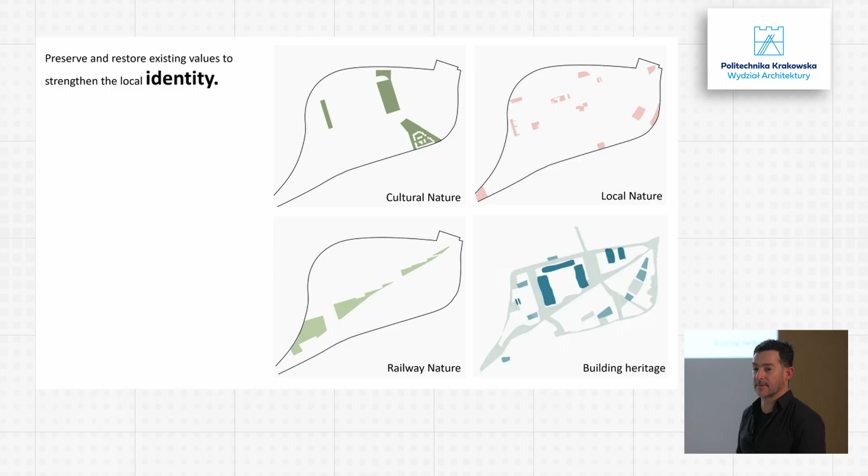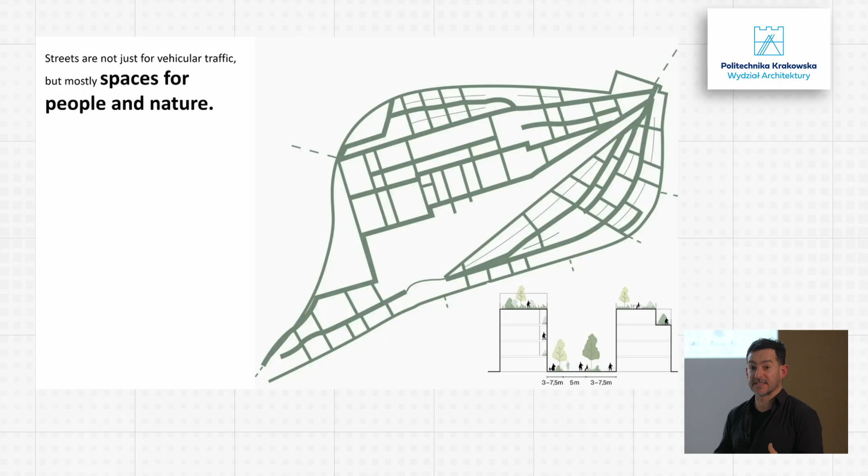Consider greenery and open space as networks, not just as separate things, but systems that work combined together. Take care of important characteristics of the area that you find there to create identity. In this case, it was greenery or some old buildings, old facilities. Consider the streets not only for traffic, but also as space for greenery, for nature-based solutions, for spaces for people. So they are a fundamental part of the network of public spaces.

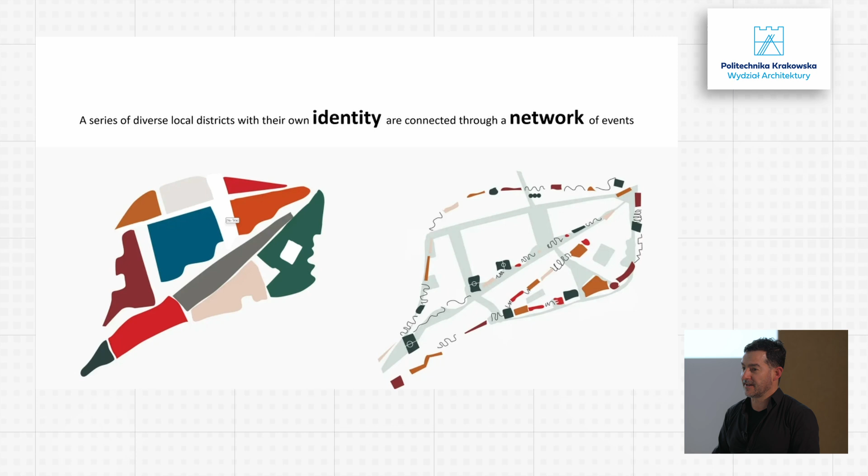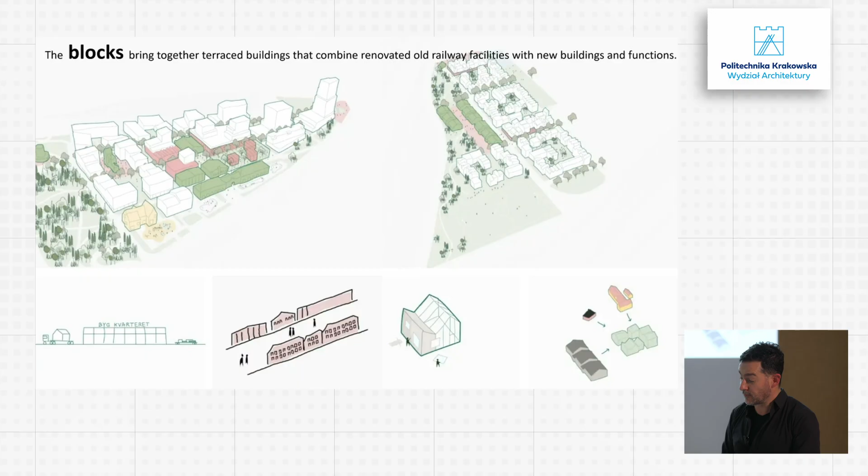In this case, of course, they create a series of local districts with different identity. And they created a series of events or special elements in all the project that create interest for people just moving around. It's about different environments, different functions, facilities, etc. And think of blocks, because blocks can be very diverse. They can accommodate many different functions, and they create proximity between functions. They create diversity of spaces, from spaces that are very people-oriented, with traffic, when you want to enjoy just watching people, but also quieter places for the needs of everybody. And they can be accommodated in many different ways, so they create a lot of diversity.

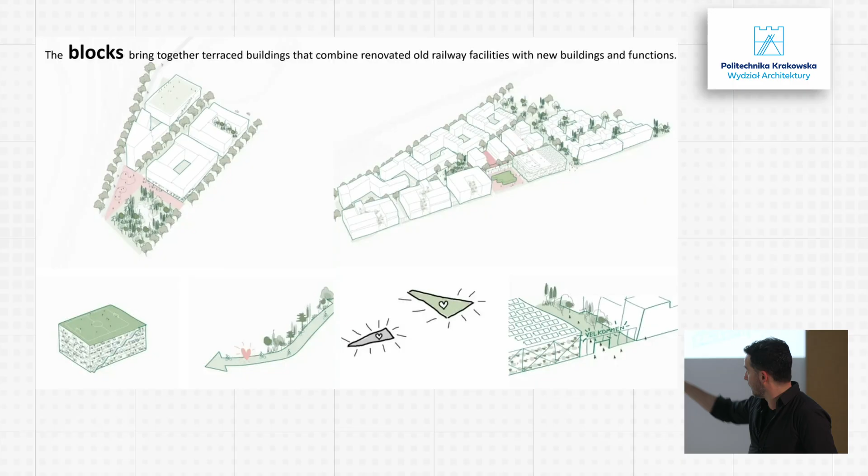As you can see here, they really think of the city in layers. For instance, the idea of combining buildings with public spaces like this. It's another building in Copenhagen where they created a sport field over a big shopping mall, like the one in the corner. And that's how the project looks in an urban plan.